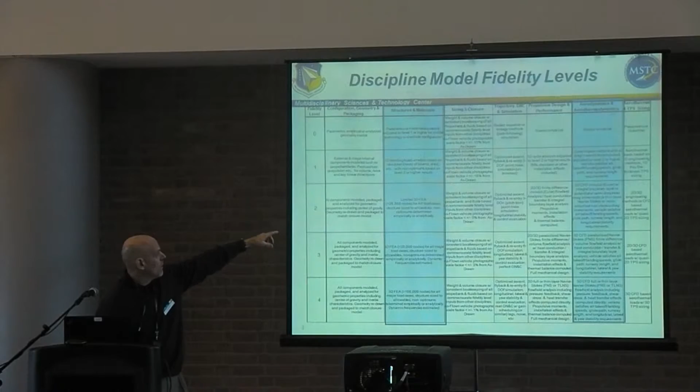And as we work our way down the fidelity levels, I'll focus on the structural area. We go from 1D bending load, and then level 2 is limited 3D finite element analysis, and then level 4 we're talking about maybe 100,000 to several hundred thousand degrees of freedom to represent the structure.

And you can look over here on the far right, aerodynamics, anywhere from scale and empirical information, we get into linearized panel methods, then down to nonlinear CFD methods, and then you can almost get all the way down to numerical simulation as well in terms of level 4. So that's how we classify fidelity levels whenever we're talking about engineering analysis.

And we're trying to get away from that; primarily conceptual design today uses zero-order fidelity. They don't actually bring physics into the design process until later. So we're trying to work our way into at least level 1, but trying to get more into level 2 and 3 fidelity whenever we do our engineering designs.

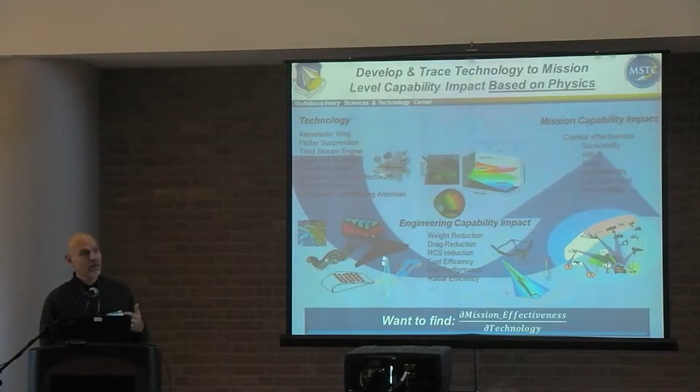And what we really want to find is the partial derivative of mission effectiveness with respect to the partial derivative of technology. All right, so at a very high level, that's what we're trying to do. So we're developing multidisciplinary technologies, multidisciplinary methods to account for those technologies in the design process. But in the end, from an Air Force perspective, it's what does this technology do for my mission? So how do we bring the high-fidelity multidisciplinary design into pre-milestone A in the acquisition process?

I'll talk about the KPPs later, but first of all, whenever you do traditional conceptual design, which you have here, you pick a technology suite, and they typically represent it with what they call K factors. They're just knock up and knock down factors on these conceptual equations. And it's very easy for them to do thousands of configurations at the conceptual design level, and that's 0th order of fidelity. No physics are included in it. It's just based on historical information for the most part.

Then they will down select based on whatever information they got from the conceptual studies, and typically they only pick one, maybe two configurations to do this high-fidelity physics-based assessment on. That's a problem, because they're making decisions early on in the process, and down selecting, they're not informed based on physics. It's just based on historical information. And a lot of the configurations and technologies that we're trying to evaluate do not appear in the historical databases. The new configurations: it's a hypersonic vehicle, it's a joined wing vehicle, it's a tailless supersonic vehicle. None of those have ever been built, so there's no historical data to tell us how those will perform.

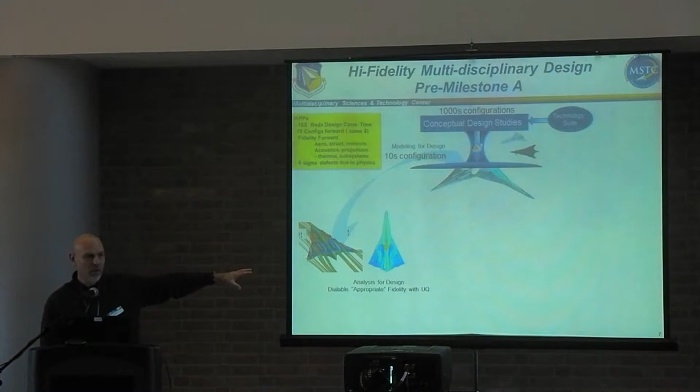Now, at the higher fidelity assessment, so we got a model for design first, and then we do our analysis for design. Again, this is the appropriate level of fidelity. At least at this point, we're actually calculating the vehicle response and the mission capability based on physics. And the way materials is used here is that we'll start picking materials. So we need material properties. But we're not designing materials. We just need the material properties, the E, the G, strain allowables, stress allowables. That's the type of information that we use to bring forward into the design process here. So we'll pick a material and then we'll evaluate how it performs.

So once we're able to do analysis for design, then we do design space exploration. Whenever we talk about design parameters here at this point, we're talking about aerodynamic design parameters, planform, airfoil parameters, things of that nature. Then also structural topology, how many ribs and spars do we have, and then sectional properties. What are the moments of inertia? What are the thicknesses? The vision would be, well, how do we bring some of those material property design variables into this process? So we can actually design the materials at the same time, not just pick a given material.

And we call that multi-scale. So we're doing multidisciplinary, but if you want to start bringing material properties design variables in, now you have to add multi-scale into this process as well. So the other thing we do is that after we're able to do this high-fidelity assessment, we do testing as well. We want to determine whether or not our methods are working properly. Do they predict the performance properly that we're trying to get? And then also we want to test configurations. Does that joined wing configuration actually give us the weight and the drag that we were predicting?

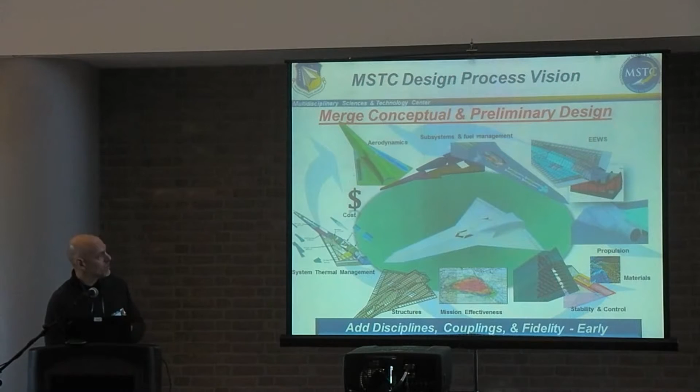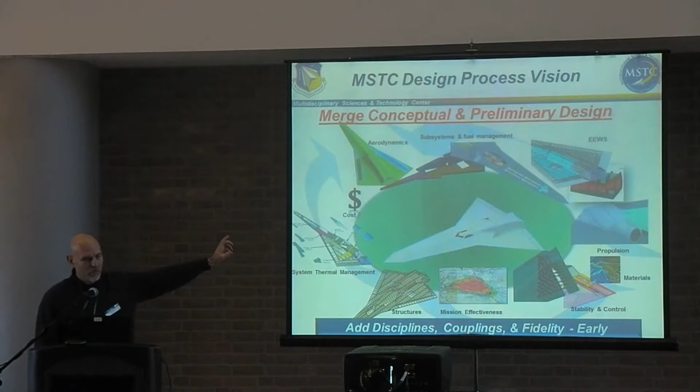But here you just see some of the disciplines that we're working on and considering. We've done a lot of work coupling aerodynamics, structures, and controls. We're now starting to bring propulsion in over there in the far right. EEWS is engine exhaust washed structures. Anybody that's familiar with the B-2 aft deck problems knows what the coupled physics and the problems are associated with that. System thermal management is a big deal. We don't do cost modeling, but we know cost is important. We have to consider it. And then you see down there in the right-hand corner, materials is on there. How do we bring materials design into this design process? And that starts leading to not necessarily multidisciplinary, but multi-scale.

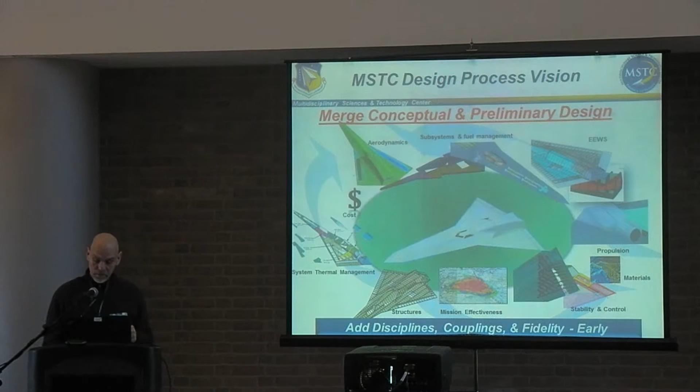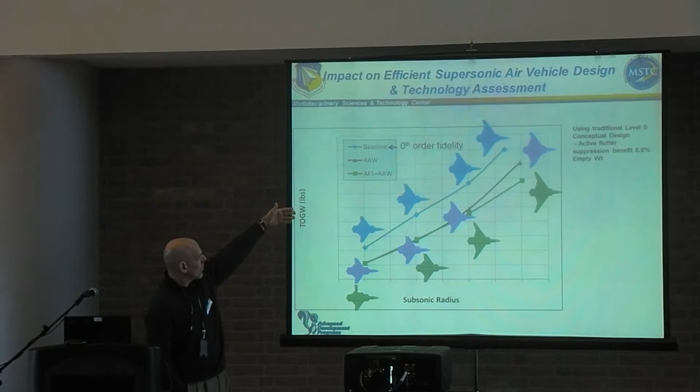Here are some studies that also show you what the impact is of coupling these different disciplines and taking advantage of it and increasing the fidelity. So we're looking at total gross takeoff weight of some tailless vehicle, and we're looking at subsonic radius. So we want low weight, high radius, right? So we really want to be here on the plot. If you use traditional design methods, this is the plot that you get, okay? And it's actually pretty close to linear. If I'm trying to increase range, I increase total gross takeoff weight.

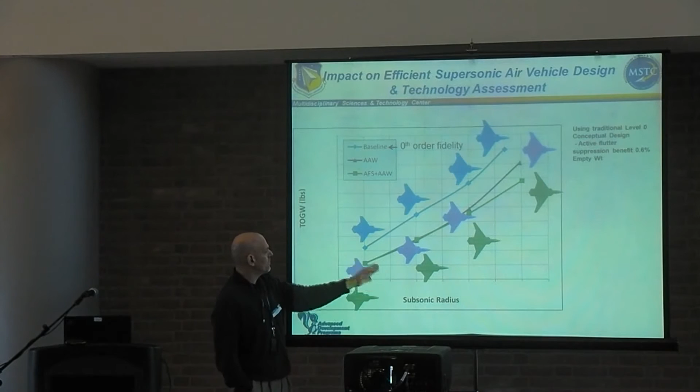Well, if we add some of these multidisciplinary technologies, and the first one is active aeroelastic wing technologies, which is coupling aerodynamics and controls in a static sense, you can get a vehicle that performs like this. We got lower weight for the same range, and then if you include active flutter suppression, you again get even a lower weight and a greater range. But look at the configuration. You start to see a much higher aspect ratio wing than you see in this configuration here. And so this shows you that coupling these disciplines produces a different configuration altogether.

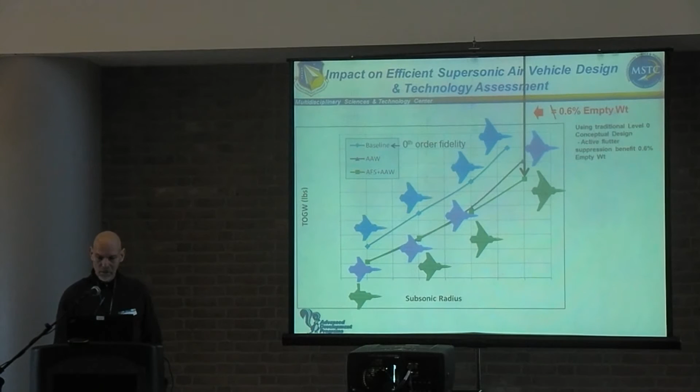Now, the one thing that I want to point out, I'm exaggerating a little bit, but what you don't see is a design for the zeroth order at this point here. And the reason is that it was unattainable. It would not close. You'd have to change the configuration drastically in order to get that performance. So really, the weight savings here is infinite compared to traditional design because we were able to take advantage of the coupling of the disciplines.

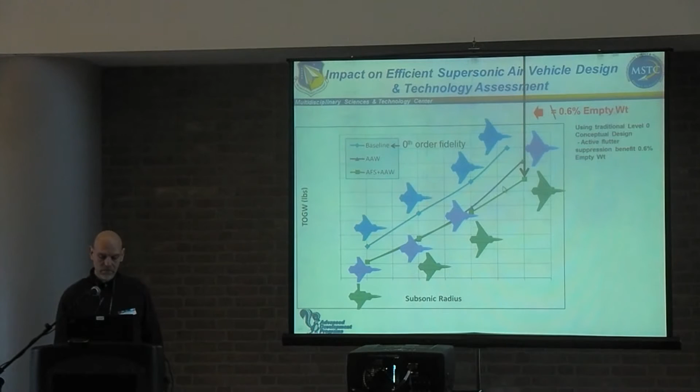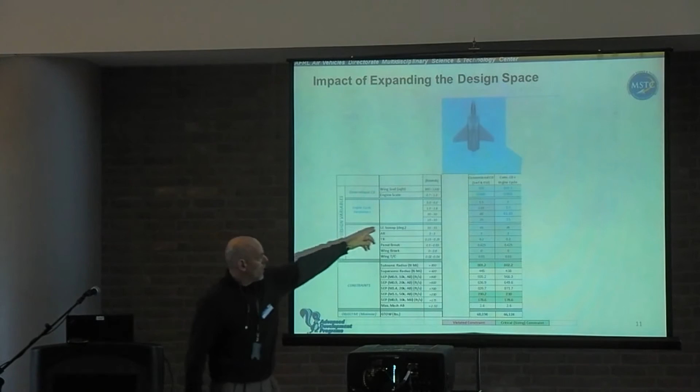So another example of this is the impact of expanding the design space. We're just expanding the design parameters that are available. We have some engine parameters, engine cycle parameters, wing parameters, constraints. So if we just do a conventional conceptual design, we just have these 3 parameters, and we get a gross takeoff weight of around 68,000 pounds. If we start increasing engine cycle parameters, just these additional parameters, now the weight comes down to 66,000.

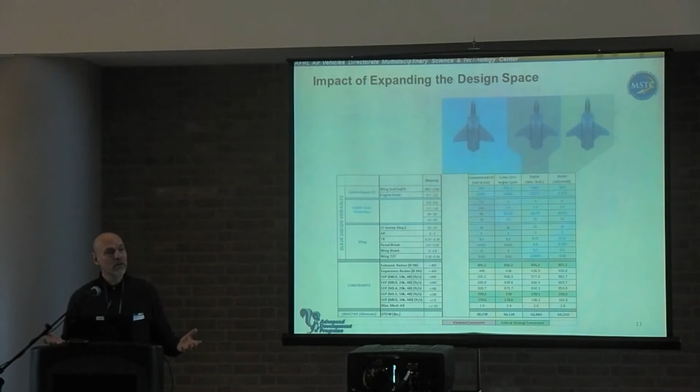And if we further increase wing parameters, we can get a final weight there of about 62,000 pounds. And then if we start adding a couple of technologies, we can get a further reduced weight, again, showing the impact of using physics-based calculations and expanding the design space with degrees of freedom and the impact that that has on mission performance capability.

And then here is another demonstration of these coupled physics. The top figure here is nonlinear aeroelastic analysis. This is the coupled physics, but it includes active aeroelastic and active flutter suppression technology. This is baseline technology here. This is AAW and active flutter suppression. What I want you to watch here is the wing root bending moment, because that's what we're trying to address.

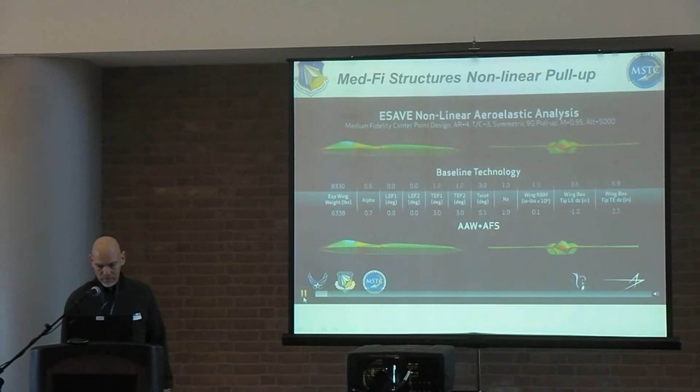We're trying to do the same flight maneuver, but we want to reduce wing bending moment, and you'll see that we also get a significantly reduced weight. So this thing's doing a 9G pull-up, and we're using the control surfaces to alleviate or manipulate the load, and it reduces the wing root bending moment by, I think it's like 30%, which means we can reduce the structural weight based on it. So 32% reduction and 24% reduction in vehicle weight.

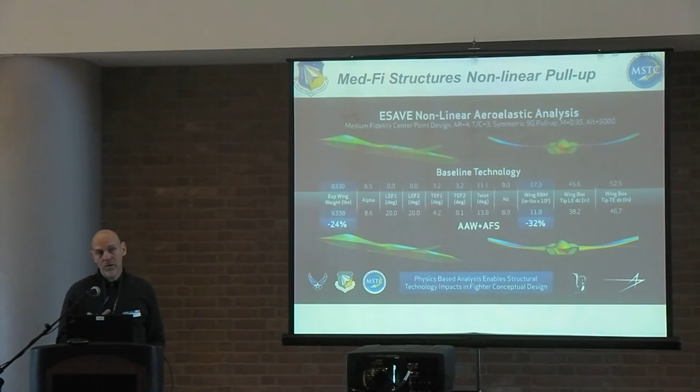We can't do this if we cannot couple the disciplines in the design process. But these computations here are considered to be level 2 and level 3 because we're using computational fluid dynamics, and this takes days to run. I think I'm about out of time, so I'm going to just jump to the end here and just tell you where the bottlenecks are.

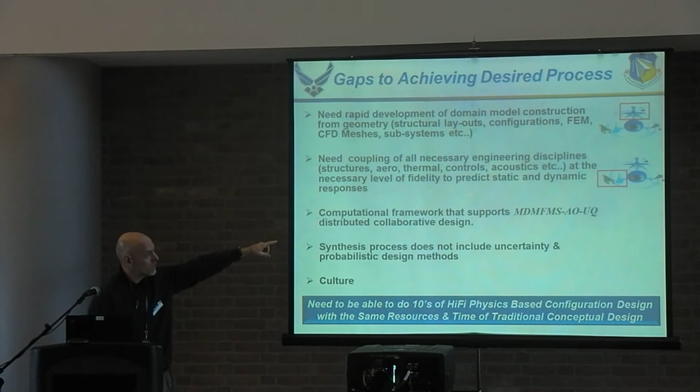Gaps to achieving this desired process of large-scale multidisciplinary design. You know, we need rapid development of the models. We need to be able to couple these disciplines and account for them in physics-based methods. We need a computational framework that supports this, and that is the monster of all acronyms. That's multidisciplinary, multi-fidelity, multi-scale analysis and optimization with uncertainty quantification. We want to be able to do all those things with this.

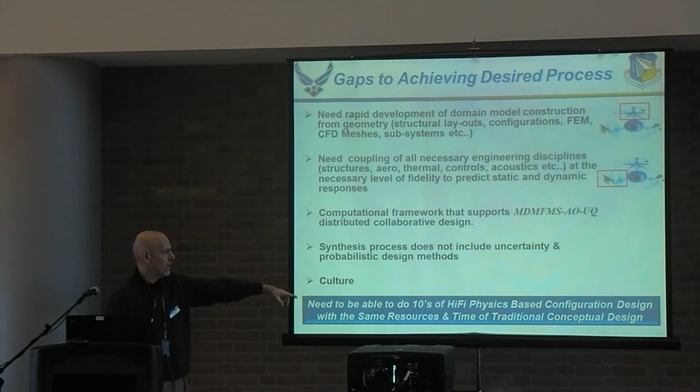And we need to put uncertainty and probabilistic design methods in, and really changing the culture is going to be a huge issue. So this is just a laundry list of some of the more specific technologies that we're after, but I'll be happy to answer any questions.

Greg, we sat down a while back and talked about trying to capture some of the knowledge that is associated, I believe, with the empirical portion of the fidelity level 0. And you had some comments about the ability to capture some of that knowledge using various approaches.

Yeah, we've spent some time trying to capture what's called the design intent, and we've used inference engines in the past, and we've interviewed a lot of designers to try and capture that information and then create knowledge-based engineering design capability. And I've made 2 attempts at that, early 90s and then again in the late 90s, early 2000s. You just can't do it.

You know, trying to get into these designers' heads and trying to capture their experience and all that information, and then try and put it in a form that can be put into a system, like I said, I tried it twice and I failed twice. So we believe: use the physics, try and do your calculations and decisions based on physics.